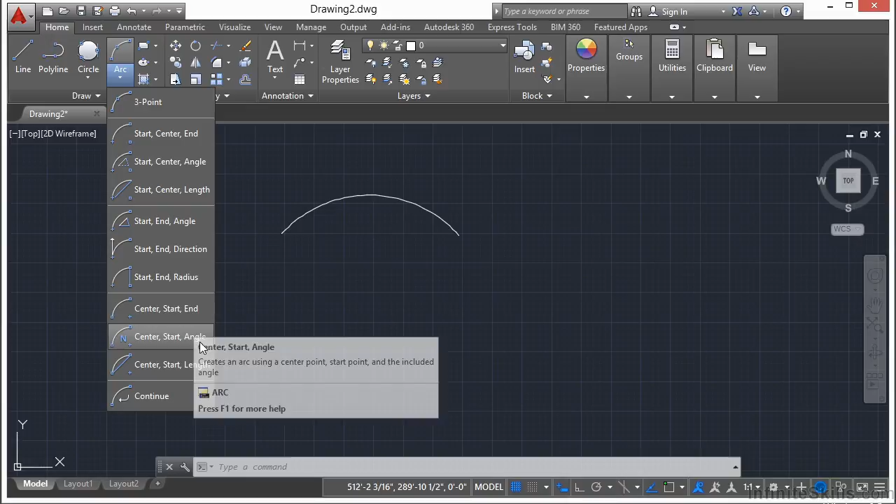You have start-center-end, start-center-angle, start-center-length, start-end-angle, start-end-direction, start-end-radius, center-start-end, center-start-angle, center-start-length, and then the continue option. I'll make sure to show you about the continue option.

Now, I'm not going to go into great lengthy detail on all of these because once you get the idea on how some of these work, the rest of them kind of make a lot of sense to you.

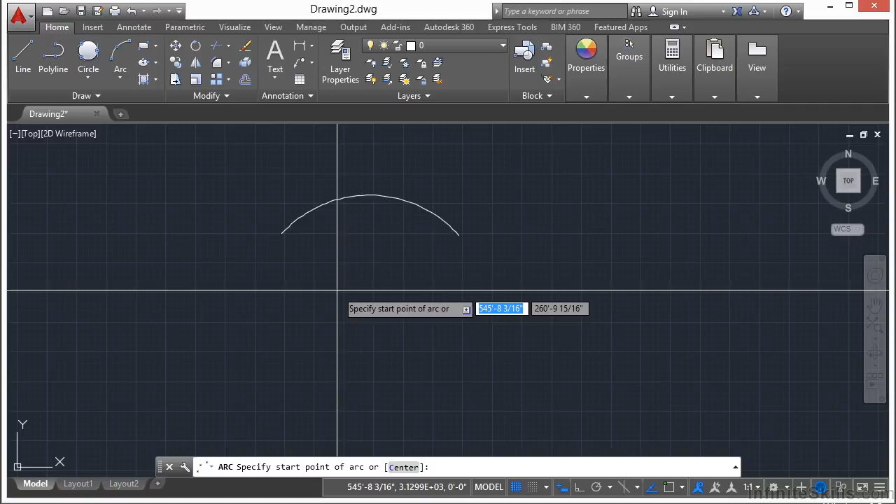So when we started the regular arc command, you should have noticed there was an option called center. This will make your first point the center of the arc. Let me show you the example here. If I click that, I pick my first point here. That's the center of the arc.

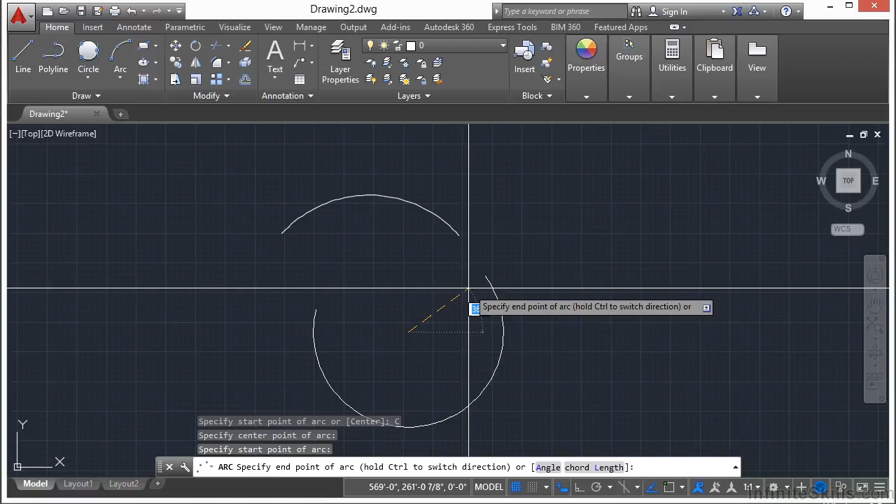Now, when I pick my next point, I can continue on drawing your arc. So it's kind of like drawing a circle, and then you type in sort of the radius or a start point, and then you just fill in the rest of it. You can do that. Well, let's open up a file that I've preset called Arc Examples.

Click Open. Now here we have in this file a lot of different lines that are set up for us so that we can try some of these things out. So if we come here, we have this little bracket that's started. Let's pick the arc command.

And I want to go to start-center-end, or start-center-angle, or start-center-length. These are all kind of similar in that you pick your first start point, then you pick the center point, and then how you define where you end up at is a little bit different on your options. So let's go with start-center-end.

So I'm going to start right here. I'm going to type in END for my end OSNAP. Make sure I'm right where I want to be. So that's my start point.

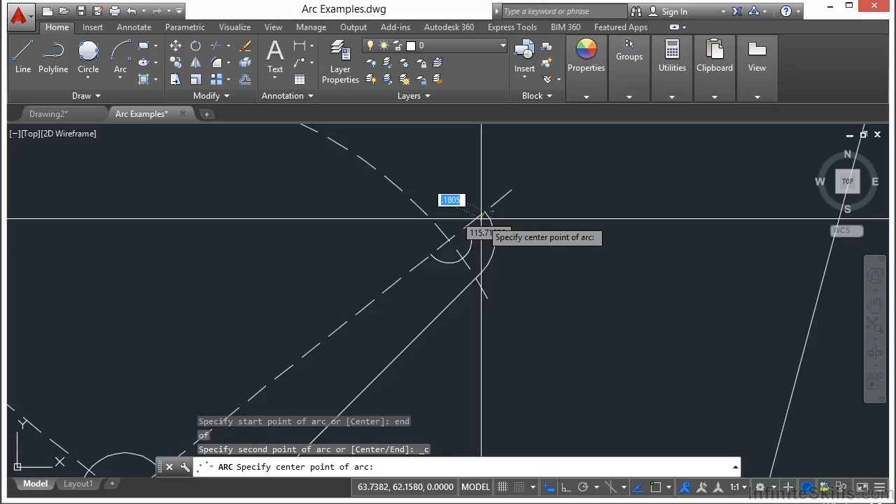Now I need the center. You can see this is an arc right here. So I'm going to type in CEN for center. This is an OSNAP to take you to the center of an arc or a circle. When I move over this arc part right here, you can see the center, which is right here, gives me a little glyph. That's a round glyph, that's for the center point.

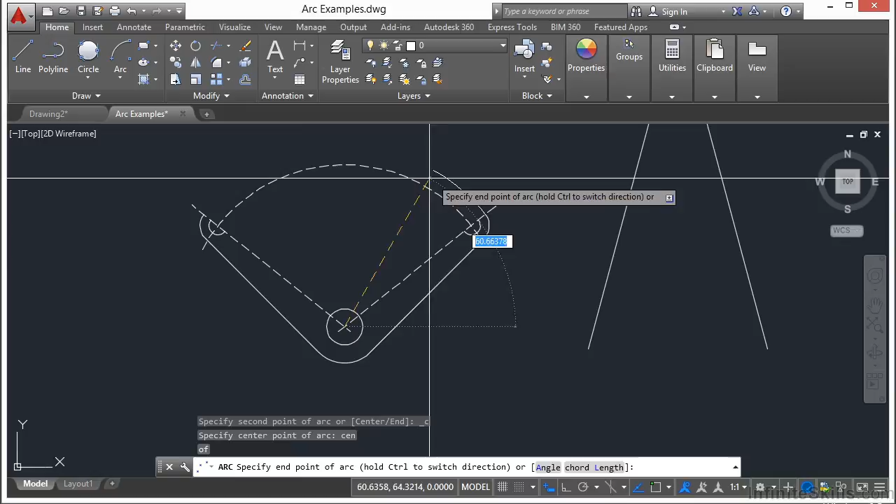So now I'm picking that center, and now I'm drawing my arc. And this is the end part. I'm just going to type in END for my OSNAP and end. So I was able to draw that arc right there. Pretty handy. I wouldn't be able to do that with the regular arc command.

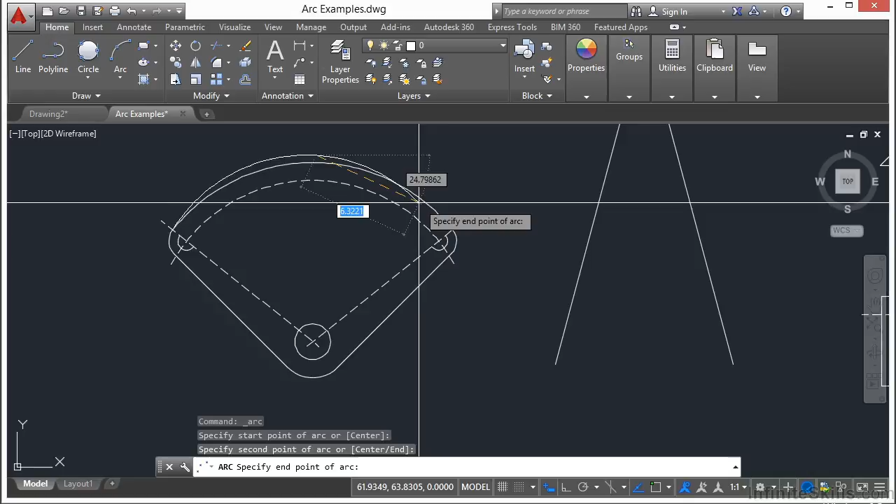I'd have to draw one point, and then my midpoint, which I'd have no idea where that was. As you can see, it doesn't really line up very well. So that are these options right here.

You pick your start point, you pick your center point. If you know where it's going to end, you can put that in there. If you know what angle it spans, so you can see what angle this is, if you know what that is, you can type that in. Or if you know how long you want that arc length to be, you can type in that option as well. So those are your first sets of options.

Now your second one is a start and an end, and then your angle, direction, or radius.

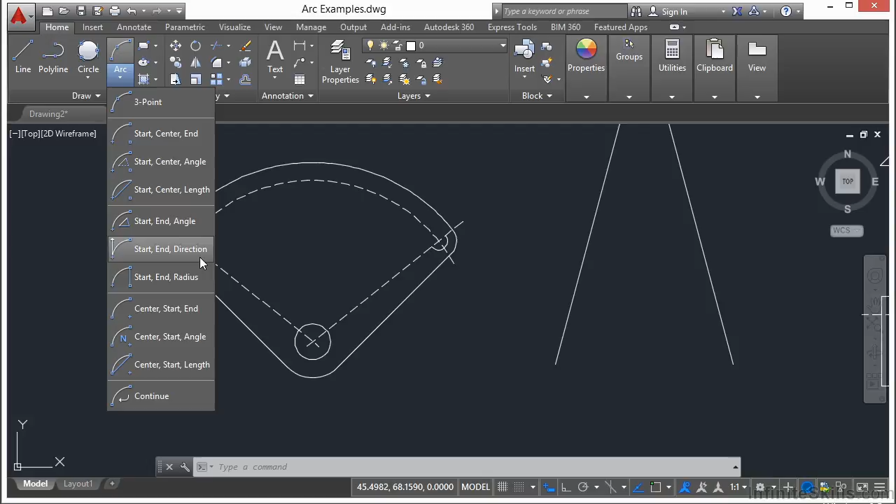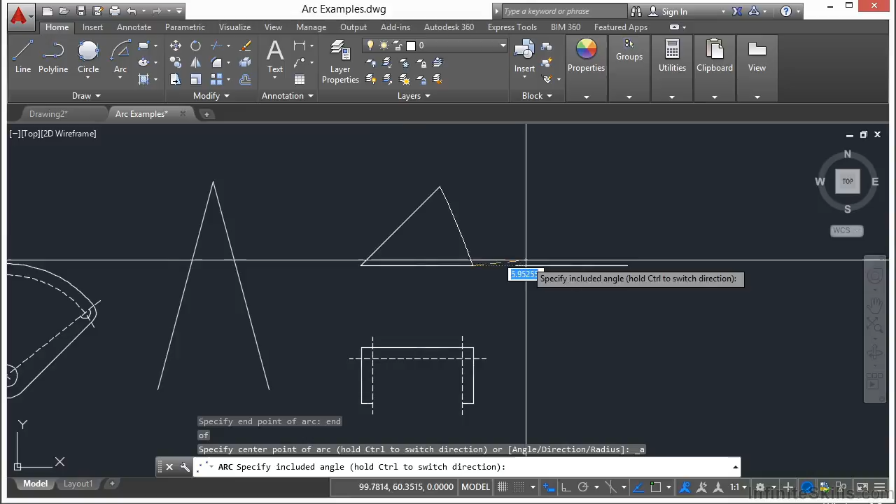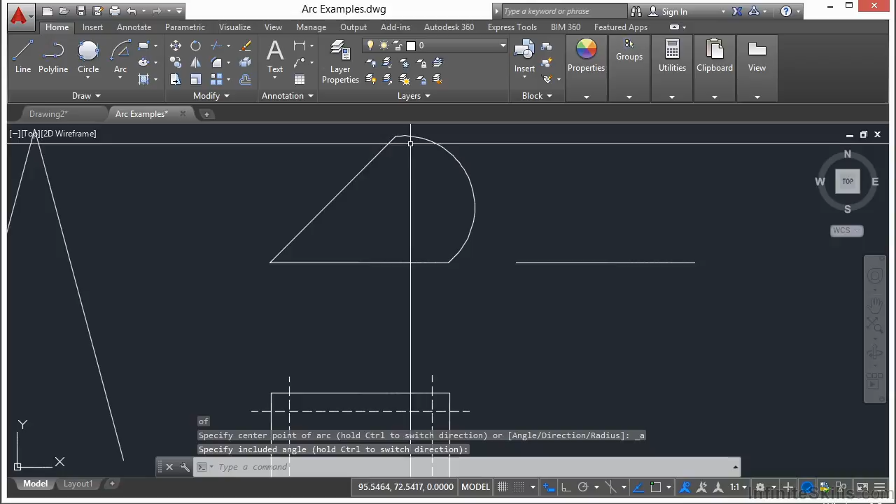Let's pick the start, end, and angle method. I pick my first start point, type END again, start here, and end up here. Then I type in an angle. As I reposition, coming straight out to the right gives an angle of 0, but as I move up, my angle increases, making the radius more ice cream cone shaped. If I know what that angle needs to be, I can type it in, or just pick a point, and it makes a nice little pie shape.

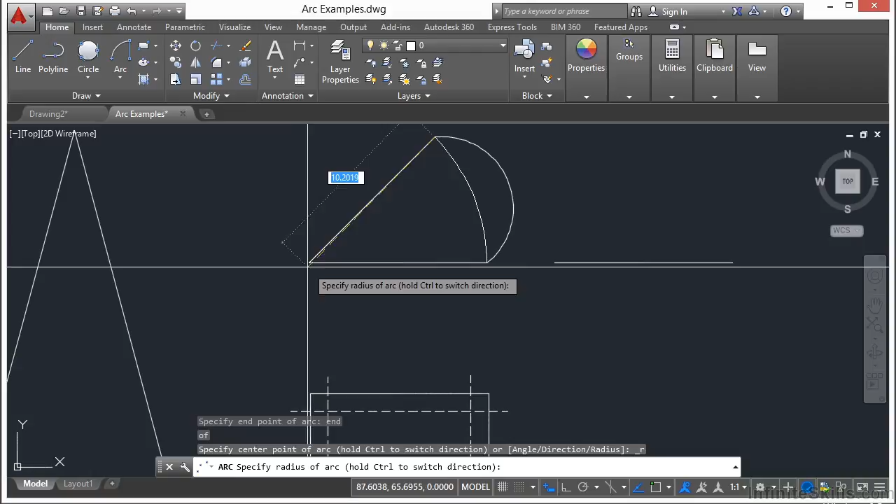I can also go start, end, radius. So if I know what the radius is, I can go start, end, and then my radius. If I know what that distance needs to be, what the radius is of my circle, I can type that in. If I erase this arc here and look at this line, I see what my length is, it's 10.

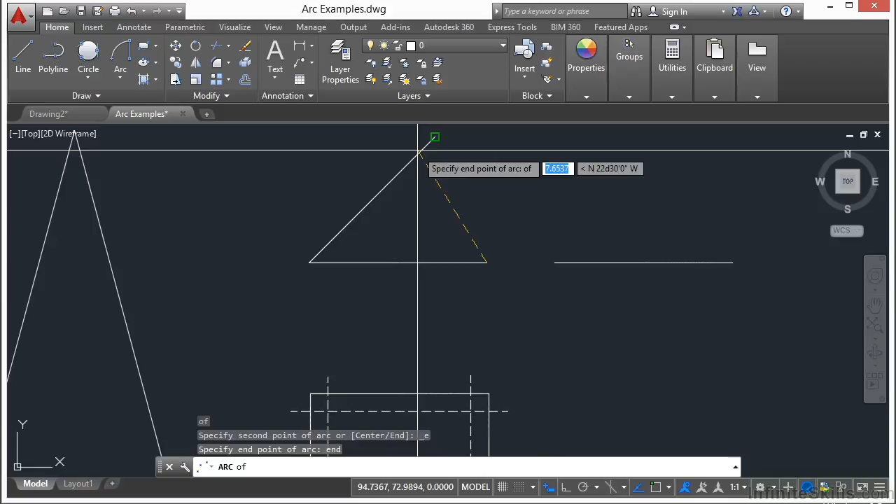Let's assume this is going to be the center point of my arc. I choose my start, end, radius option. Type in END, pick this point, and then type in a value of 10 units. This draws a circle and makes a perfect pie shape for my arc. And that works fantastically.

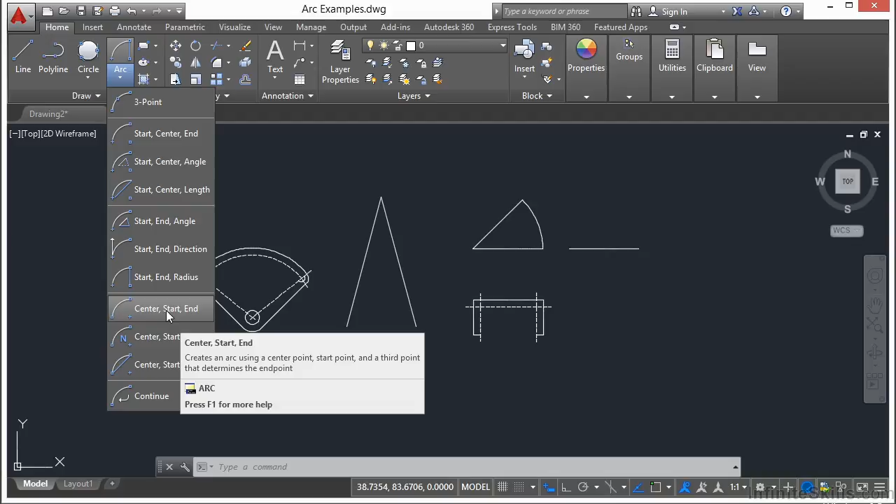Now this last section gives you the center point, the start point, and an end point, or an angle or a length. So let's look at the center, start, and end. First I want to pick my center point, right here, using my endpoint snap. My next is my start point. Type in END, pick here.

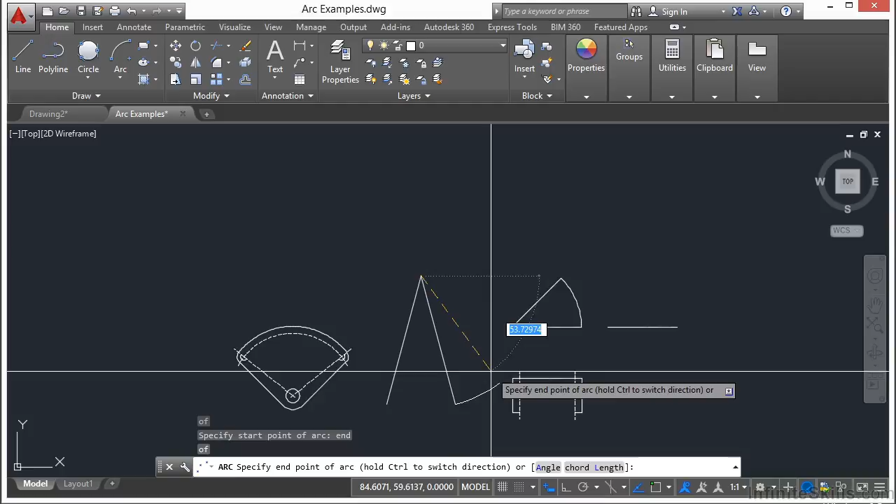Now there's one thing to keep in mind with arcs. When you start an arc, regardless of how you start it, it is always drawn in a counterclockwise direction. So if I do this, it will draw a very large upside down Pac-Man looking shape. But if I want my arc to come through this middle part, I have to hold down the control key, and that will switch my direction so I can draw it again. If I type in END, then hold down control, move over here, it'll snap to that point right there.

So which one of these arc methods do you use? Well, it depends on what information you have and what you want to draw. How do you know that? You just have to look at it. You have to see, like in this case here, we knew the center point, the end point, and the start point, so we were able to use that option. Here, with this method, we used these first options. We knew the start point, a center point, and an end point.

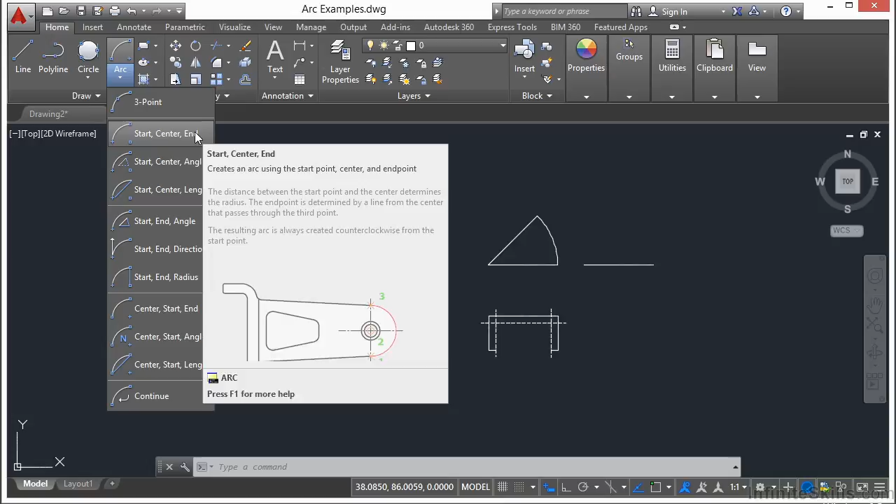So a lot of these are the same thing, start, center, end. You see here, start, center, end, they're just in different orders. You have start, end, angle, direction, or radius. So it also depends on what you have and what order in which you can get to that information. It's just a matter of trying it out and getting used to it.

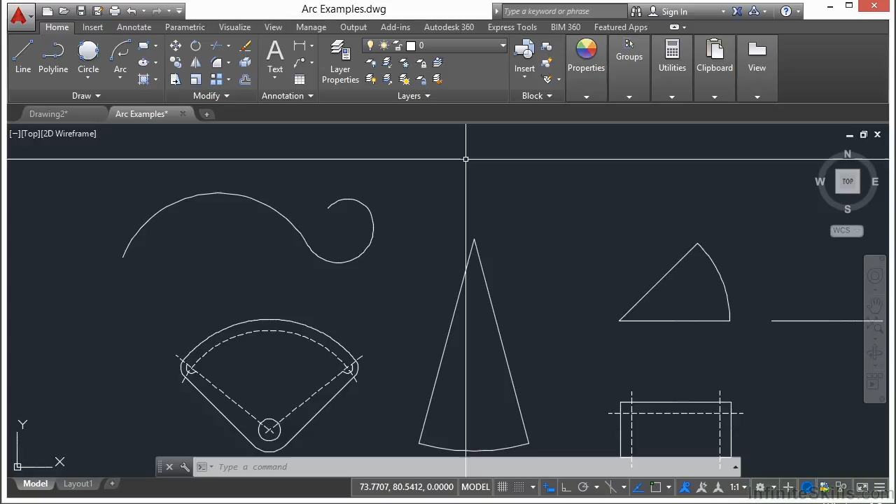Now that continue method I wanted to talk about is a nice little thing. If you draw an arc and then want to continue that arc, meaning not lengthening it, but drawing another arc that starts from that same point, click the continue option. This will draw another arc tangent to the last one you drew. It'll only draw one and then the command ends. You can't press enter to restart it, that'll just restart your arc command but it won't be continuous. You have to go back manually, click the continue button, and keep drawing it that way. It's a nice little thing that draws an arc tangent to the last arc you drew, but it's a little cumbersome to use, though it is there and available.

So as you can see, there are a lot of different ways to draw arcs, and you need to use the method that's best for your specific situation based on what it is you want to achieve and what information you already have.